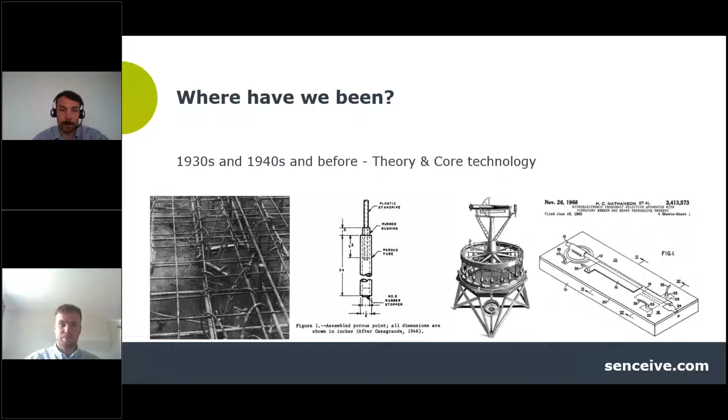So again, existing technology. And even the MEMS technology that Senceive relies on for a lot of our sensors was invented back in 1965, or at least patented around then. So the bottom line is, we are relying on all these amazing things still today. But now let's look at where Senceive comes from.

Callum? Thanks, Arnaud. So Senceive is a spin-off from University College London, founded back in 2003, and it's from their engineering department.

Been developing wireless monitoring solutions that focus primarily on the civil engineering sector and bringing some of the equipment, as Arnaud previously stated, some of the vibrating wire or MEMS sensors to the 21st century. So not as old as the rest of the industry, obviously, but as you can see, quite an early origin for our company.

If we look at where we are now, still as an introduction, we've tried to focus on from the early 2000s till now, and the main point that we want to make is that from this initial technology, from these initial theories, the main changes have been the automation and the visualization.

When it comes to the technology, if you take the example of, as I said, theodolites and more so total stations, or if you take this example of a large project in Amsterdam with Soldata at the time, that was one of the first large deployments of total stations being put in a large network of 3D measurement. So obviously here, automation of the data coming back to an end user.

Same thing when it comes to platforms. For people in the UK, a lot of you will know UCIMS and the goal of UCIMS on Crossrail, this large project, bringing the data all together from different actors, different partners on a large project. So that is really a trend today, making sure that all the data from different types of instruments, different types of actors can come back together.

But one point that we wanted to make was also the rise of Excel. If you work in monitoring or in engineering in general, that's obviously a tool that you're very familiar with. And if you look even today, when you have all these new platforms, all these new systems, a lot of people still rely on this good old Excel spreadsheet. When you look at reporting, when you look at a lot of calculation, a lot of people still rely on that.

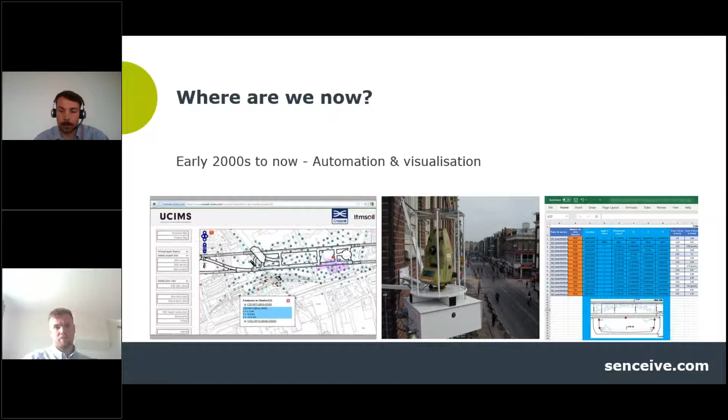So that's the current state of technology, the industry. Obviously, a very quick overview. There are a lot of things happening, but these were the points that we wanted to highlight in introduction. Now let's look at where Senceive is today. So it's the same as the industry as a whole, kind of developing into automation and visualization.

So from the early sensors developed, we've created a larger portfolio, whether that be tilt meters, automated crack sensors, optical displacement sensors, then also been listening to the civil engineering markets and designing brackets around that, whether that be beams or magnetic mounts. We also have multiple wireless platforms, so point-to-point here, GeoWAN, or a more highly dense flat mesh platform as well.

From the early idea of developing the best wireless platform for any industrial application, obviously Senceive evolved to finding the best solutions for each and every application on your civil engineering construction projects, which explains why we have so many new developments, new sensors, best adapted to the civil engineering industry. So that's the current state of play.

Now, if we look at where we're going as an industry in general, the main points that we want to highlight are first the technology democratization and the collaboration between people and technologies. If you look at different trends that we've seen with our partners, surveyors, engineers, the rise of things like 3D scans, but also LiDAR, these are becoming more and more accessible to a lot of projects, small and medium size, as well as the large projects that we'll present later.

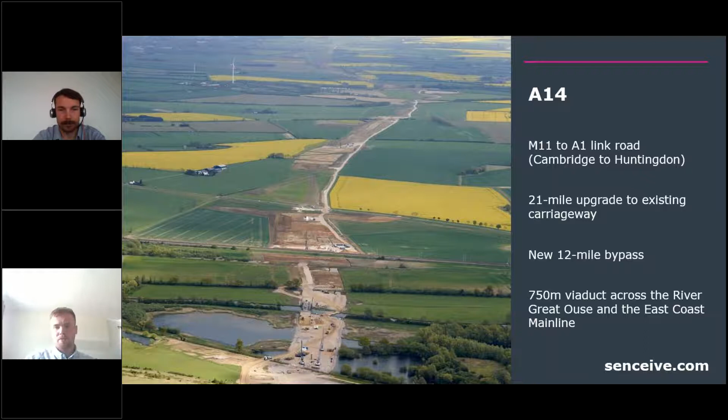Okay, so we're going to start with the A14 here and see how wireless systems improved safety and data reliability on a remote site. So as you can see here, this is a highways project between the A1 and the M11. It's around 20 miles of road in a very remote setting. It also crossed the River Great Ouse and 4 tracks on the East Coast Main Line. Yeah, so quite a remote site in the middle of Cambridgeshire. Yeah.

So the challenges for this included obviously its rural location and the access to the East Coast Main Line that ran through the site in this example picture. The monitoring had to be reliable given the construction was set to take multiple years, and obviously the severity of the UK weather. And then obviously the safety of workers, both on the construction site and on the track, was paramount. So reducing the time spent monitoring the track or by people on the construction sites was extremely beneficial.

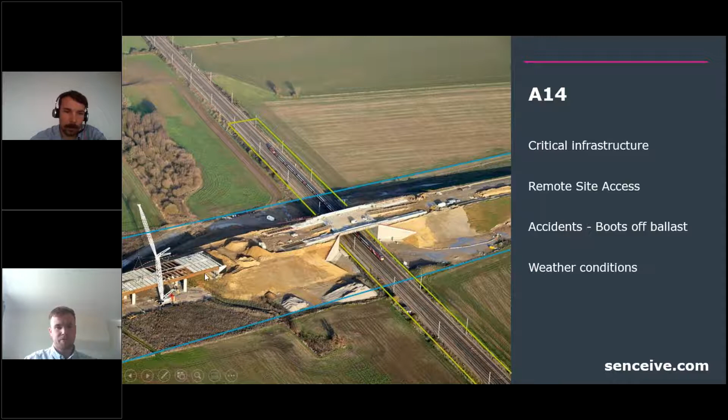Yeah, here we can see in the picture in green the actual area that needed to be controlled, and obviously the new viaduct and the new road that was being built across that. So that's the setup. Thanks. Given the remote setting, as stated before, it needed to be precise and reliable. So in the picture here, we have some tilt sensors on the track itself. I believe there was roughly 500 meters of monitoring per track, and there are 4 tracks here. There was monitoring of the catenary poles and monitoring of the abutments being constructed.

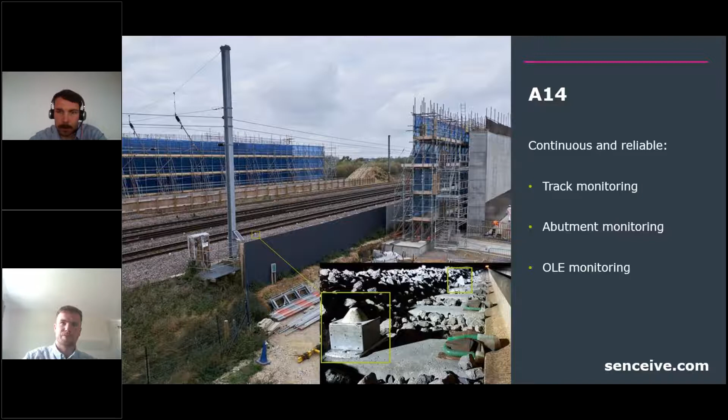We also installed backup gateways for redundancy. So if for whatever reason communication couldn't be sent, we had a redundancy backup there, which increased safety because it reduced time spent accessing the site. Yeah, so it's quite good to understand that not only did the technology stop people having to access this busy track too often, but as Callum pointed out, the backup gateways, always sending back data or potentially saving data on their internal memory, really helped to deliver that data on this rural site where we had quite difficult access. So that's it for the A14.

Moving on to the next capital project or large infrastructure project in the UK with the Network Rail earthworks. Yeah. Okay, so with Network Rail, we needed to provide monitoring solutions for an aging infrastructure. As stated here, there are about 190,000 earthwork assets within Network Rail across 20,000 miles of track in the UK. The majority of these earthworks, whether they be embankments, soil cuttings or rock cuttings, were built over 150 years ago and are coming to the end of their life. There's an increase in train capacity at the moment, with climate change adding stress to the network.

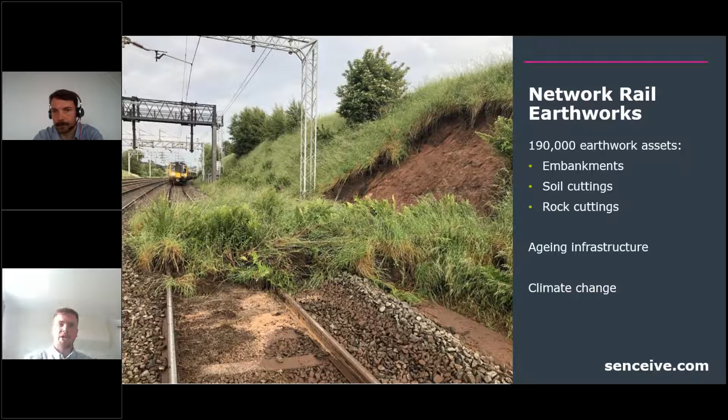Okay, so across the 20,000 miles of track, the biggest challenge is that most of the assets are in a remote location, and especially in the south. A lot of these cuttings and embankments are very steep in comparison to their current design. So I believe most motorways or new rail links or cuttings are built at about 18% versus the 40% seen in the south.

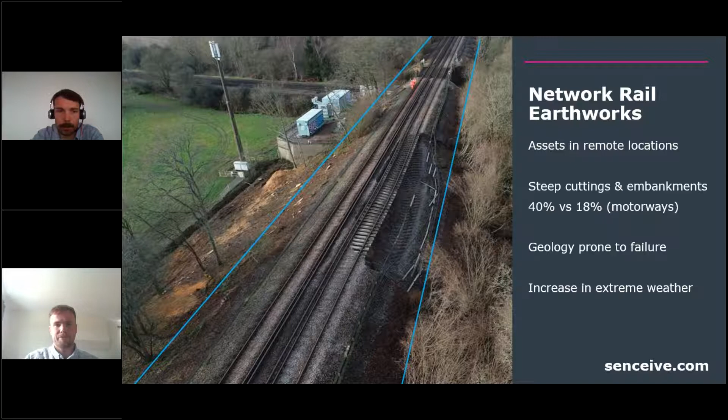Climate change is increasing the severity of the weather, and that's impacting on these embankments or cuttings, earthworks. Especially in areas to the south where a lot of the geology, like clay, is prone to failure with expansion and shrinking. Yeah, on top of that, really deep Victorian cuttings make it hard to access or make it more prone to accidents. So a difficult environment to potentially monitor.

Yeah. So with remote condition monitoring, it allows us to observe multiple sites. Given that there's 20,000 miles of track, you can't be everywhere to monitor. So having the ability to do monitoring of multiple assets remotely gives us the opportunity to monitor more, 24/7, 365 days a year. It gives us the ability to detect early failures, as seen here at Barnehurst, that could result in disruptions or potential loss of life.

It also gives us the ability to do proactive monitoring. So in areas where they may be planning to do repair works in, say, 5 years' time, if they are actively monitoring that area, perhaps repairs may have to be taken sooner as they better understand the earthworks themselves. And then the final point is it can help us assess post-repair designs to see if the earthworks are behaving as intended.

Yeah. So one of the key points and the reason why wireless technology is deployed on these large areas is that you can do reactive monitoring of areas that are failing, like potentially in Barnehurst or other sites where you know that you have potential failure and therefore potential risk to the traffic. But most importantly, it's also about the proactive monitoring. That's quite important, and that's what wireless technology can allow you to do with a cost-effective technology that you can deploy quite easily across large areas.

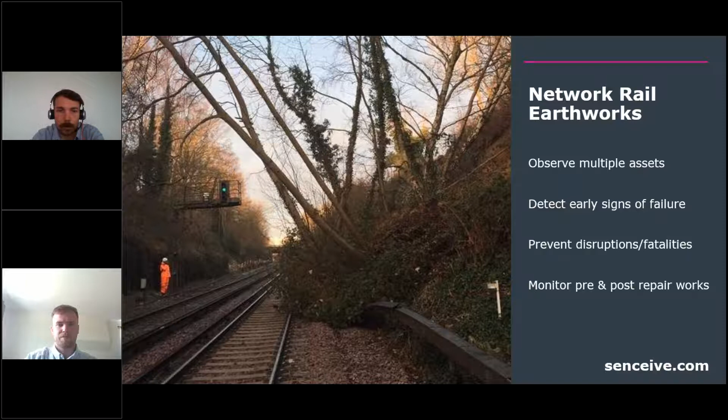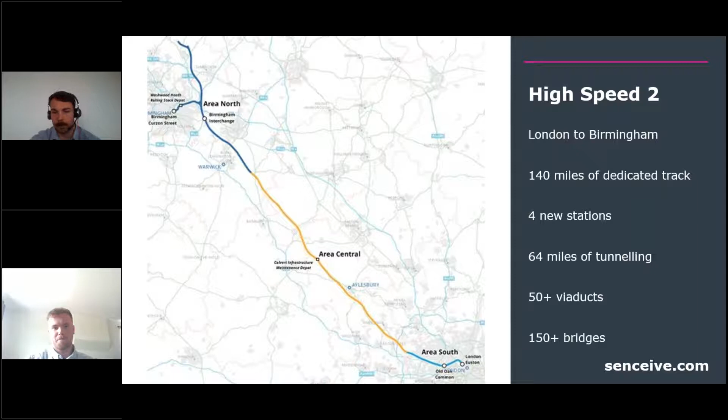Moving on to High Speed 2, famous High Speed 2 in the UK. Yep. So most people here, I'm sure, know the sheer size of High Speed 2. It's Europe's largest high-speed project at this time, and there's a huge diverse array of infrastructure to be monitored, whether that be tunneling, viaducts, station construction, earthworks and bridges. They occur in both rural and urban environments, so dense and sparse monitoring requirements require different monitoring platforms. Yeah, quite different environments, different actors as well to deal with across the route.

Okay, so why is HS2 a challenge? Well, the route runs along some of the UK's most important infrastructure routes, whether that be the West Coast Main Line or the M6. So data needs to be reliable and constantly available. There are also multiple asset owners and contractors. There are 9 zones on HS2 with the main works, but there were lots more previously with the enabling works. And a lot of this infrastructure cannot be accessed frequently using traditional methods. Yeah, so different environments and quite a lot of challenges depending on where you are and with different sections.

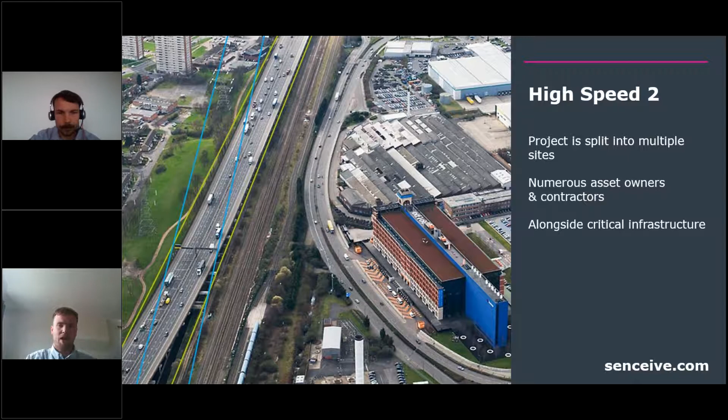Okay, so as previously stated, the project is split into multiple sites, numerous asset owners and contractors, and it's alongside the critical routes. Here, for example, this is Bromford Viaduct in Birmingham, where we have strain gauges, tilt meters, and crack sensors along the viaduct itself, and that is Highways England. That is very different to Curzon Street, which was previous, with tilt meters on the track and tilt meters on the retaining walls, which is a Network Rail asset.

And then finally, to conclude, how Senceive can help. We have different sensors and connectivity platforms that allow for monitoring of all types in all types of environments, whether that be urban or rural. It allows for continual construction alongside critical infrastructure routes, whereas accessing, say, Highways England or Network Rail property may be harder to achieve over the lifespan of this. They're saying 10 to 15 years construction for this project. So having that remote wireless monitoring gives us the ability to monitor long term without having to disrupt these infrastructure routes.

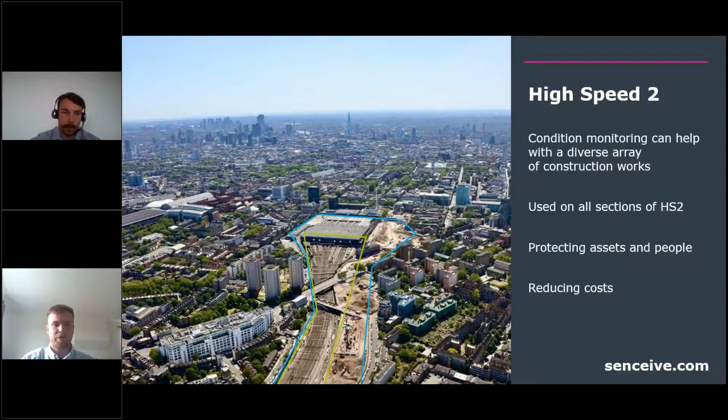And it offers one system, one turnkey solution to all zones across this route. Key point here is probably the flexibility of our system, both when it comes to the applications and the actual technology, different sensors that can apply to different types of applications. But on top of that, the flexibility to work with every actor, either one that stays for a long time on one section, or changing actors through the length of the project. So really, the flexibility of the wireless system makes it one of the best tools to use on this application and on this type of large projects.

So that's it for the UK examples. As you can see, quite a mature market. Again, if we look back at the legacy of projects like Crossrail, it shows that the UK has really made an effort to accept wireless technology as part of specification requirements on these capital projects, because it's already experienced the benefits of using this technology on this type of sites.

So now let's look at Europe, where things have been maybe a bit slower to take off, but where the main focus has been to adapt existing processes, simplify existing procedures, and make sure that they're building on existing expertise.

So the first project that we wanted to present is the Grand Paris Express. This is a huge project, one of the biggest, if not the biggest in Europe. You have 68 new stations being built, several kilometers of additional track, and on top of that, the difference between new lines being built, new tunnels, existing lines being extended, and new stations added to your setup.

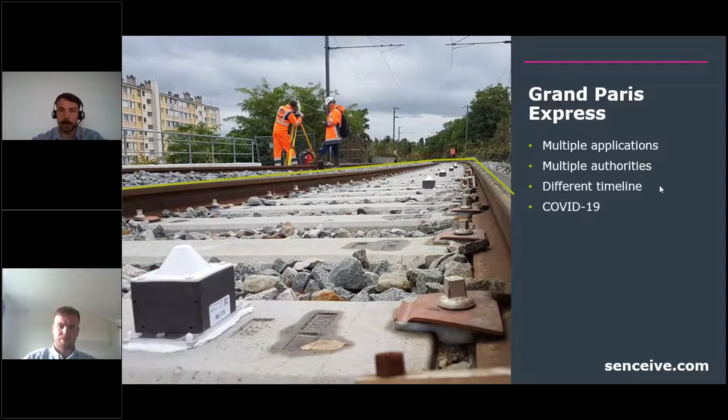So the challenges when it comes to the Grand Paris, similar to what we've seen in the UK, are multiple applications, multiple authorities, and different timelines as well. It's a project that extends over several years, so you have to take that into account when you pick the technology for one or multiple sections, and the possibility to reuse this technology over time. But the final challenge that has been true for everyone, but especially on this project that has been going on for a couple of years, is COVID-19.

How do you work when you're not able to send as many resources on site, when people are stuck at home, or when it's a bit more difficult to access a project? So how can wireless technology help with that?

Well, the key point here to remember is that wireless technology, and Senceive wireless technology specifically, can adapt to the current project requirements, or the ongoing project requirements, through improvements that you can put in place.

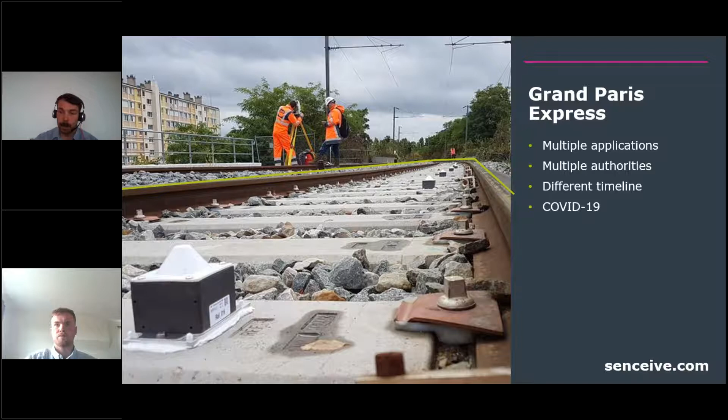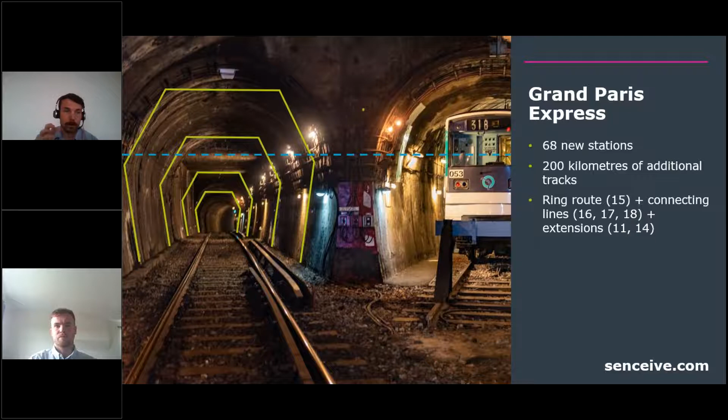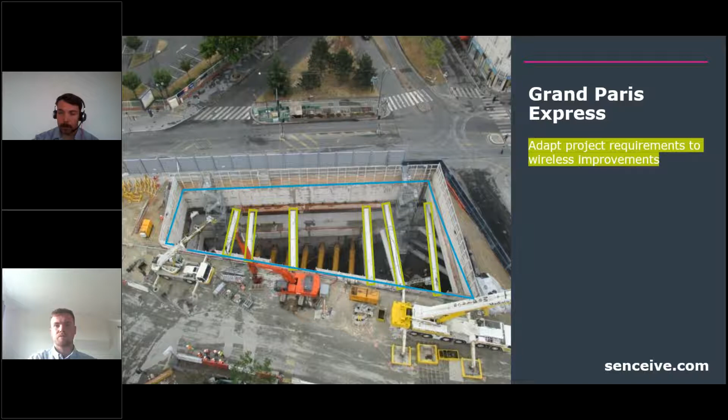And finally, when you look at tunnels, the use of tilt sensors or laser sensors instead of standard manual or automated survey can provide a cost-effective, easier-to-install solution in older railways, like here with the RATP in France. So here, the use of GEO1 tilt sensors across this tunnel, monitoring different sections while they're building a new tramway line on top of it. So the key point is you have the ability to adapt your project requirements with wireless technology, thinking about new ways to improve the data that you can get out of it.

Now, moving on to the second capital project that we want to focus on in Europe, which is the Mediterranean Corridor. The part that we are looking at right now is what's called the door to Europe, in the northeast of Spain, in Catalonia.

Our technology has allowed different actors to monitor multiple tunnels in this region, which is really a funnel for the Spanish trains that want to reach Europe and different EU countries after that. To give you some perspective, in this specific area there are up to 1,500 trains a week, so very much a bottleneck for the circulation.

That means that when it comes to monitoring, you have quite a lot of challenges. You have multiple sites because, as I said, multiple tunnels and multiple structures across large areas. You have a constrained installation window because the Mediterranean corridor does not only involve these tunnels, it also involves new train tracks, electrification, new train gauges. So you have to make sure your monitoring program fits with the existing schedule. On top of that, you have an important level of concurrent work, meaning a lot of activity right next to each other.

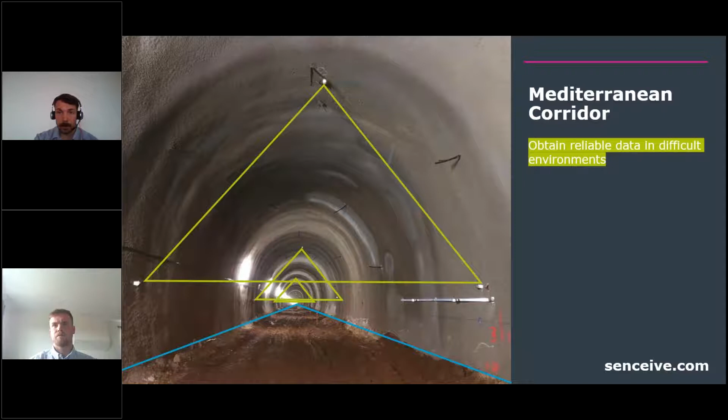So it gives you the flexibility and reliability of obtaining better data with an easier installation, and can be completed with this type of tilt beam, longitudinal tilt beams that can provide additional differential settlement information on specific joints of the tunnel or specific parts of the tunnel that need to be checked for stability. So here, reliable data in different difficult environments.

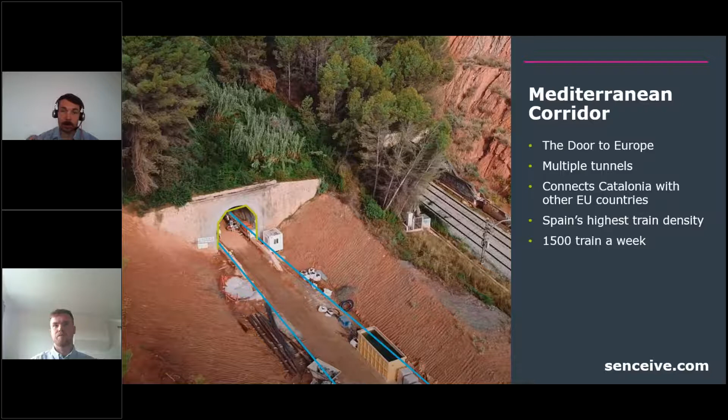Same thing here. Tunnel again, ODS sensors monitoring the convergence, but think about having a lot of activity, a lot of people passing around, moving things and working. As you can see here, a lot of dust as well, potential difficult connection in a deep cutting, and therefore the wireless solution making it easy to retrieve the data back to your office without having to go back to this type of site. So that's the main advantage on this project.

Now, final example for the European capital project is the Anse du Portier, a huge project in the south of France, in Monaco exactly. 60,000 square meters of land reclamation, as you can see right here. Very clear what they're trying to do: build new square meters to put very expensive apartments, hotels, and new shops in Monaco.

630,000 cubic meters of dredging, so potential huge impact on the seafront of Monaco, as well as implementing 18 concrete caissons of 10,000 tons each and 1,100 piles. So huge activity, potential huge geotechnical and structural impact on the adjacent structures.

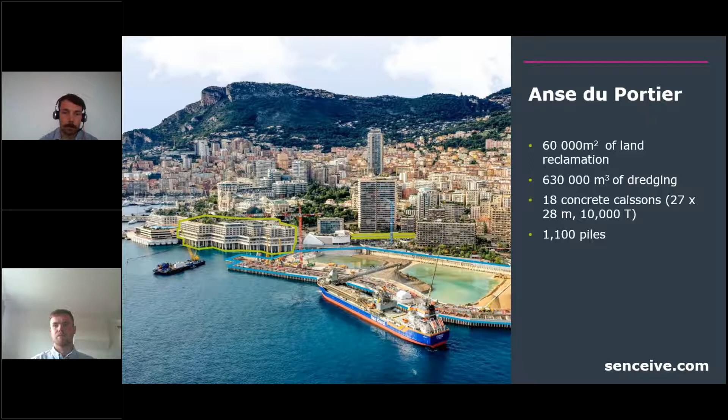If we look at the actual challenges, it's obviously a high-profile project. Everyone knows Monaco, everyone knows how expensive it is. But on top of that, there's the harsh seafront environment that you have to face. The Mediterranean Sea is beautiful, especially when it's sunny, but you have the same problem with corrosion, the same problem with wind chop, and the same problem with humidity over time and strong sun during the summer.

So you have to make sure that you have a reliable technology. You have a mix between public space, because it's very touristy, because you have a lot of circulation, because you have the Formula One track that I'll show you in a second, but it's also a mix with difficult access.